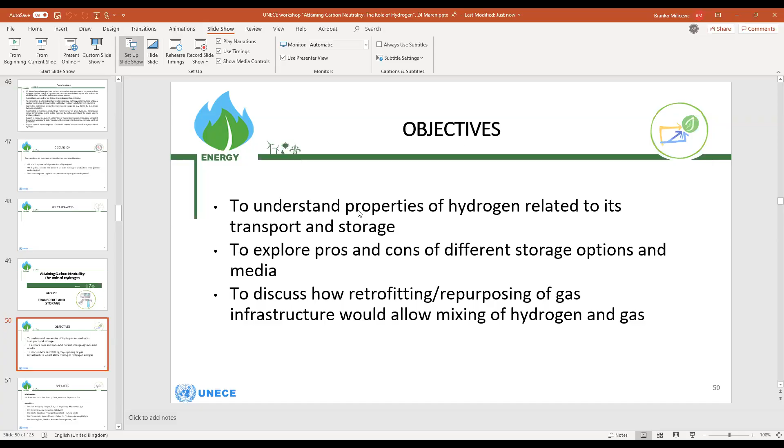So let's start with a short introduction from my side. In this track, we'll assess where we stand with transport and storage of hydrogen, and discuss how we can help overcome many challenges by harnessing the expertise in the gas sector. Production sites have to be connected with consumption, using several transportation modes, either pipelines, ships, trucks, in liquefied, compressed form, etc. All of them deserve to be analyzed.

Hydrogen can also be stored. Both transportation and storage are integral parts of the infrastructure needed for the above said connection to happen. For instance, some time ago, our group of experts on gas recommended that ECE member states leverage on the existing conventional and natural gas infrastructure as a cost-effective entry point for developing low-carbon alternatives, such as hydrogen. The infrastructure in question includes both transport and storage.

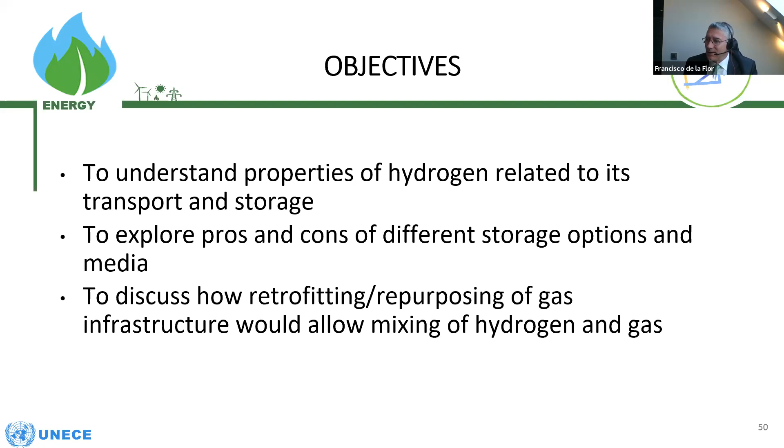I cannot resist to say, regarding one of the statements said by the Deputy Executive Secretary in his opening, I think that hydrogen shouldn't be seen as a liability. It's not a hazardous material, but it's an asset. And this entity, UNECE, has vast experience in setting regulations, norms and standards needed to contain and transport gases such as hydrogen. So we should take advantage of that and build on what we already have.

About the speakers today, we have 5 speakers who will talk us through the challenges and opportunities I mentioned, and that were in the previous slides: blending, storage, pipeline, retrofitting, and so on. I will quickly refer to the speakers in such a way that then we go one by one. I will introduce all of them in this address.

The first one is Abel Enriquez, EU Regulatory Affairs Manager in Enagás. He's also the person that will share with us what is happening in the roundtable on transport of the European Clean Hydrogen Alliance. He is the Sherpa of one of the co-presidents of the roundtable, and as you know, usually the work is done by the Sherpas, devoting dozens and hundreds of hours to this topic. Second, we will have Gaelle Cauchois, principal consultant at Carbon Limits.

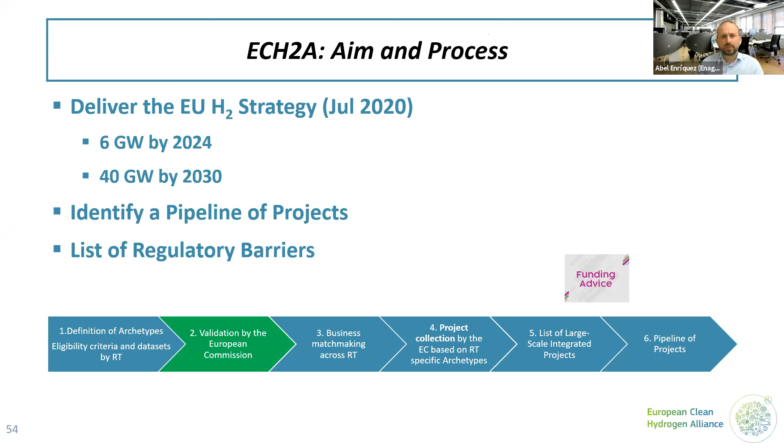In the next slide, you will see that the alliance is structured around 6 roundtables: one on production, another on transmission and distribution, energy sector, industrial applications, mobility, and residential use. The one I'm going to talk about today is transmission and distribution, linked to the topic of this workshop. This roundtable is facilitated by ENTSOG.

They provide the secretary role, and then it's co-chaired by 3 companies. If you click once more, Branko, it will appear. There are 3 co-chairs leading this transmission and distribution roundtable, together with around 40 companies which are part of that roundtable.

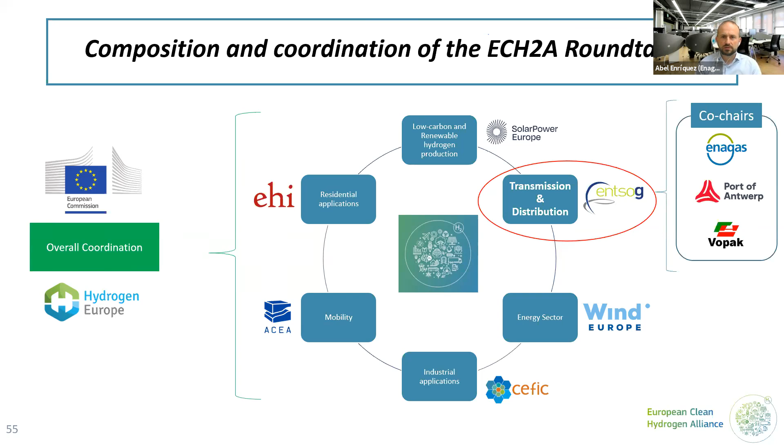In the next slide, you will see that the transmission and distribution roundtable has agreed on a number of categories or archetypes in front of you. Due to time limitation, I won't go into detail, but there will be an archetype for transmission and distribution pipelines, another for marine storage and handling terminals, a third related to shipping, which is also a way to transport hydrogen, and a 4th archetype about inland distribution by truck loading, rail, barges, or other technologies and logistic options.

In terms of transport technologies, the roundtable is really open and inclusive. We are not just limiting ourselves to liquefied hydrogen or pressurized hydrogen, but also planning to study and assess projects dealing with ammonia, with other hydrogen carriers like liquid organic hydrogen carriers, methanol, methane, etc. A number of technologies are part of this roundtable.

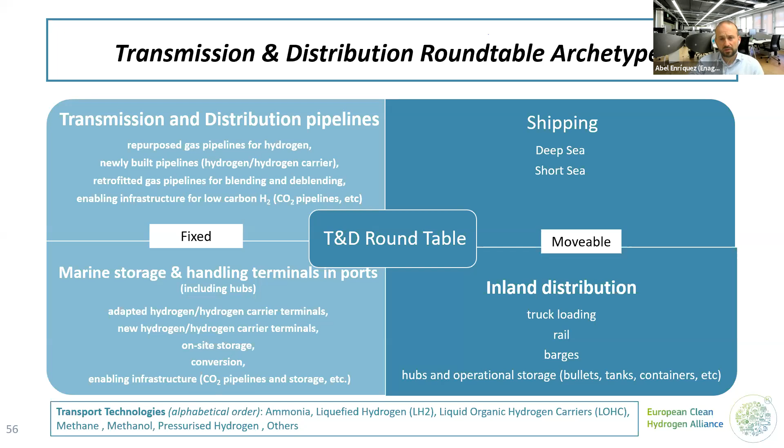They can qualify to become part of the official pipeline of projects. In the next slide, the last one, I'm presenting the vision. On the 10th of March, the CEOs of 40 companies which are part of this roundtable agreed on 5 key principles which constitute the common view of the roundtable, about the role of hydrogen and hydrogen infrastructure in the future energy transition process, and also delivering the EU energy and climate targets.

The first principle is about the role of hydrogen as an enabler, being at the heart of the energy system, a paramount element for sector integration, integrating electricity and gas infrastructure, and making the whole energy system more sustainable, reliable, cost-efficient, and flexible. This is fully coherent with the strategy of the European Commission and the European Union. The second principle is about the role of hydrogen transportation, distribution, and storage, which as we said before, will be based not on a single but on multiple transport modes and multiple transport technologies.

The third point is that there is a common understanding and belief that hydrogen transport, distribution, and storage infrastructure, necessary to handle renewable and low carbon hydrogen, will surely contribute to achieving the objectives of the European Commission hydrogen strategy and the EU Green Deal. It's important to understand that there are different ways of transporting, distributing, and storing hydrogen, and all of them are part of the roundtable.

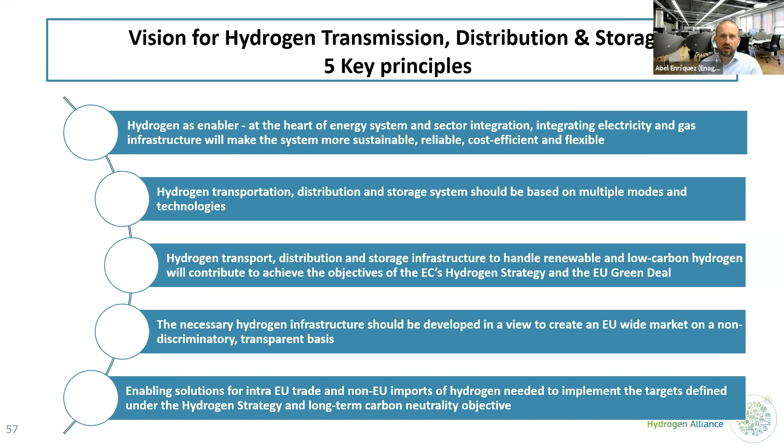And with this, I'm just finishing my time. Thank you very much for your time and attention. This alliance is also fully in line with your carbon neutrality project in UNECE, so they can go hand in hand in delivering the energy transition. Thank you very much.

Thanks, Abel. Let me say something here. I would like to avoid being too European Union centric. The ECE region covers the Northern Hemisphere, 56 countries, and we could give the impression that we are focusing only on the European Union. In the previous session we had Konstantin and Tatiana, where the main focus was on the eastern part of the region. Anyhow, please apologize if this seems too European Union centric. As Abel was saying, this is a global topic, so the external dimension is also trying to be covered.

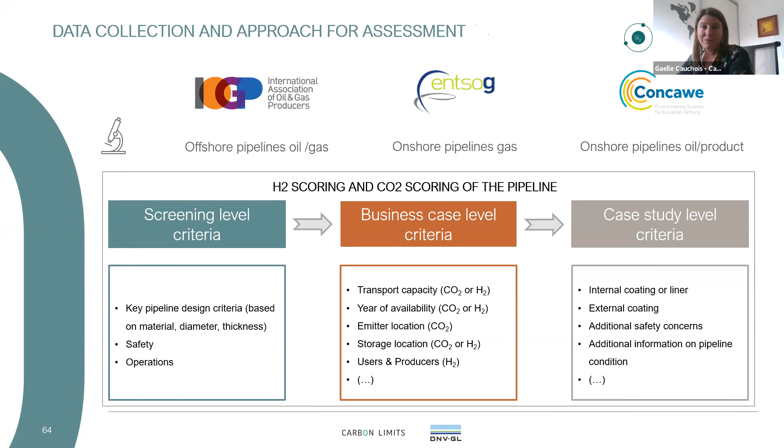To identify locations of sources and sinks, we mapped the current location of, for instance, wind and solar farms that could become hydrogen producers in the future, and did the same for each potential consumer, from cities to train stations, to iron and steel plants and producers as well, so also ports for imports. And we did the same with CO2 sources and sinks.

We then transferred the estimation of others, not ours, per sector onto our point data based on various activity data, and managed to build a grid of high probability production and consumption for sources and sinks. And that is where we are as of today.

As we are in the process of selecting case studies for the economic assessment, for now we do not know yet the outcome, as it's still ongoing, and it should be finalized in June 2021. But those kind of fact-based exploratory studies done at EU level for now could be beneficial to all UNECE countries. Thank you for your attention.

Thanks, Gaelle. That brings to my mind one comment. Tatiana Mitrova was referring to practical projects, and let's go to practical projects in terms of transportation.

One of the most practical things we can do is just to assess what we already have underground, the pipes we have underground, because this would be a very quick start in the development of hydrogen.

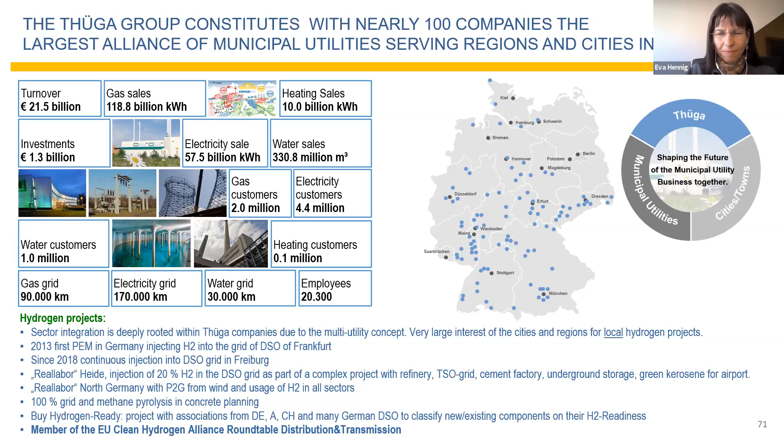What I would like to tell you is we have a parallel system in most of the countries. So we have the TSO level and we have the DSO level. In Germany, we will have at the TSO level probably mostly pure hydrogen grids parallel to the methane grids. And the very large customers are connected to the TSOs, and of course the underground storage is connected to the TSOs. At the DSO level, and maybe this is the specificity of Germany, 99% of the industrial consumers are connected to the distribution grids. More than 70% of the consumption of the industrial consumers and nearly all of the CHP plants are connected to the distribution grid.

This is probably also one of the reasons because we have very large regional distribution grids operating also high pressure pipes. So what we see at the moment is that we are planning a blend of hydrogen into the distribution grid, but we are also looking at pure hydrogen grids as soon as we have the backbone, the famous European backbone, also in Germany, coming from the TSOs. So we could inject pure hydrogen also to special customers.

What we are looking at are the CHP plants, for example. You all might know the taxonomy in Europe. The taxonomy is very strict, so the CHP sector is one of the first that has to decarbonize. But we also have very large industrial consumers who have interest in pure hydrogen. So we will have a stage-like approach coming in the next few years, and blending, of course, is the first very important step because we see this as the fastest step and also as the most cost-efficient step.

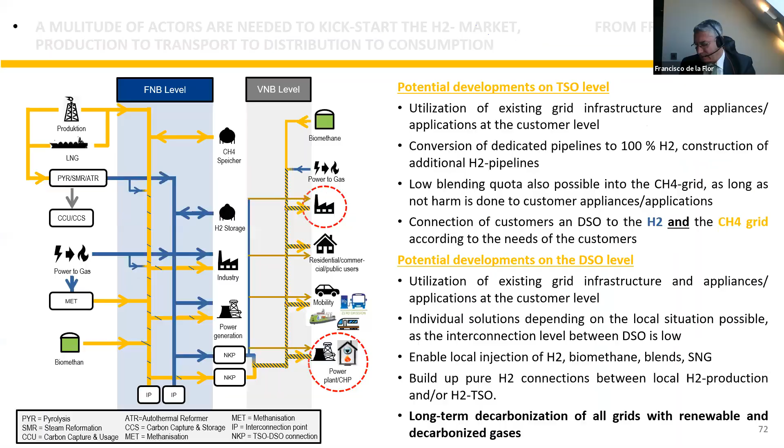Thanks, Eva. Seems to be a quite wise approach, for sure. I dare to have a comment. Yeah, we...

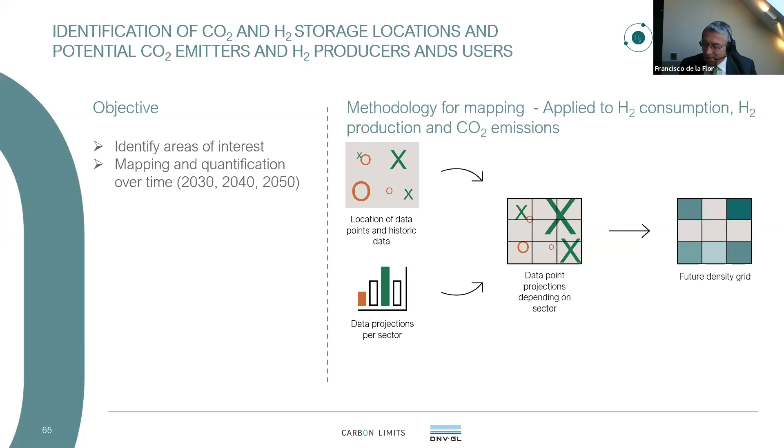We achieve, in some cases more than in others, an integrated gas market in the EU. I'd say not in all places at the same level, but now we have another gas in the grid, either mixed or pure, which is hydrogen.

So it will be good to just continue with the aspiration of keeping this integrated gas market with a lot of injection points.

And then using the network just to connect the production sites and the consumption sites.

And then, this is just from my own view, I do believe that we already have a good regulatory framework.

So it could be relatively easy to mirror that framework, and use it as inspiration or as a base, or just probably copy-paste with a small adaptation for hydrogen.

Because, in between, as you say, hydrogen and natural gas will go together, as much as mixed within mixtures and blending.

So thanks, Eva. Also, we'll check just for the discussion. Probably somebody will ask, and then we need also your views on the questions we will have here in the agenda.

It's like growing bananas. If you want to grow bananas in France or Russia, you're not going to be very successful. The same thing goes for hydrogen. You need to go where the resource is, and the resource is very cheap electricity, and very cheap electricity comes from solar. So in the end, it's going to be from the south. That's the fact of life.

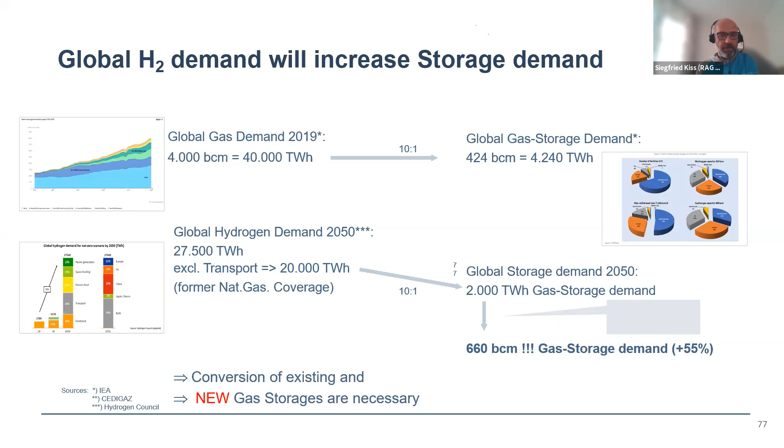Two main needs drive this demand. First, it's the need for hydrogen exports and imports to balance demand and supply. As an example for Europe, RAG is involved in a project for importing hydrogen from Ukraine, and this means a significant increase of storage capacities for hydrogen in Central Europe.

The second need is for interseasonal energy storage. For example, here in Austria - and this is valid in many countries - with the data for a policy scenario of 100% renewable electricity production in 2030, during the summer period excessive electricity production has to be transferred to long-period demand in winter days. Hydrogen as an energy carrier is the only way to balance the energy system and provide security of supply 24/7, 365 days. To store hydrogen on a large scale is not an easy task.

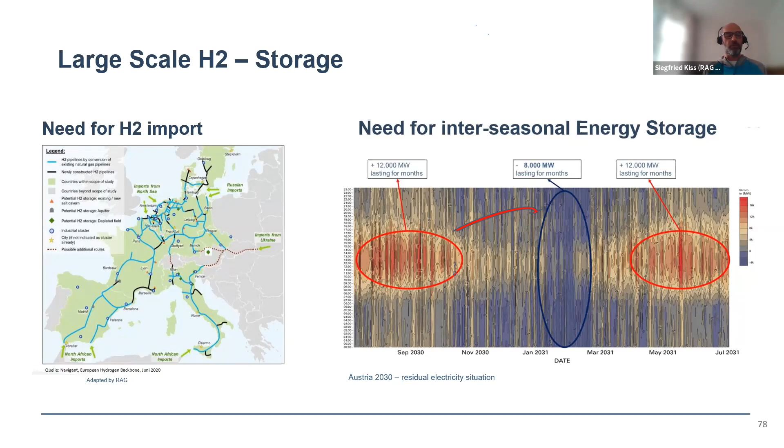So therefore RAG started - next slide please. We already started in 2013 with a research project called Underground Sun Storage, the first in the world. We injected 10% hydrogen admixture in a sandstone reservoir and investigated the integrity of the whole storage system. In a follow-up project, Underground Sun Conversion, we investigated the conversion of hydrogen plus CO2 in a reservoir, because it's converted into methane with the help of microbes called archaea. Our recent project is Underground Sun Storage 2030, where we investigate 100% hydrogen content for storage.

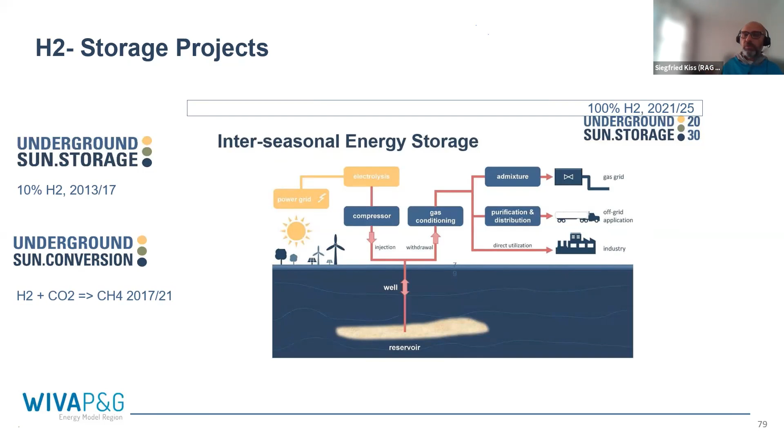I think that's a very short presentation. I'm looking forward to questions and happy to answer if possible.

Thanks, Siegfried. Yes, I said this was very innovative, and your ideas could be very inspiring for this forum. So thanks for making the time. I knew you had a conflicting agenda and you decided to cancel the other to be here. So thanks, Siegfried, for that. You're more than welcome.